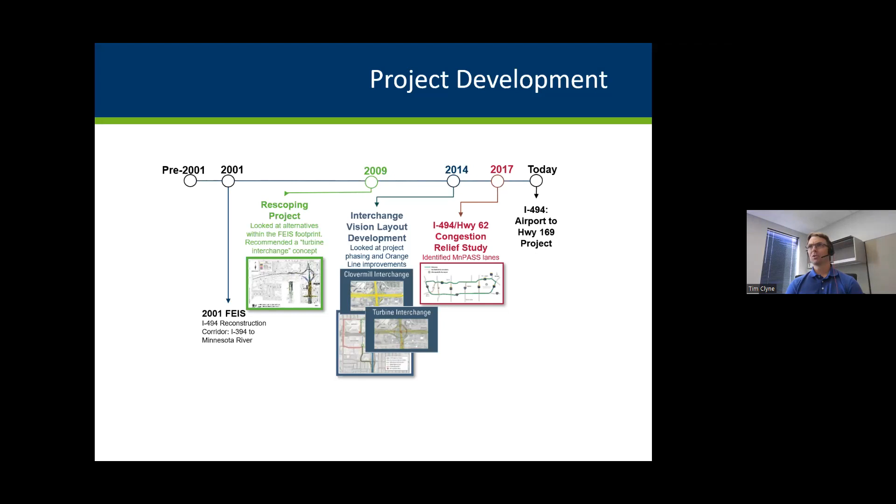The 494 corridor has been studied at length going back over 20 years. We started back in 2001, publishing the first report of what the corridor should look like. There were other studies published in 2009 and 2014, diving into more detail. Then recently in 2017, reports looked at both the Highway 62 and the I-494 corridors for congestion relief, and 494 was identified as the corridor to get the next round of improvements. So that brings us to where we are today.

This project is led by MnDOT, the Minnesota Department of Transportation, but we certainly can't do this alone. We have a lot of partners who have helped us along the process: the Cities of Richfield and Bloomington, Hennepin County, Metro Transit, Met Council, the airport, and our friendly feds at the Federal Highway Administration. We also have a whole bunch of stakeholders, of which the Corridor Commission is a part.

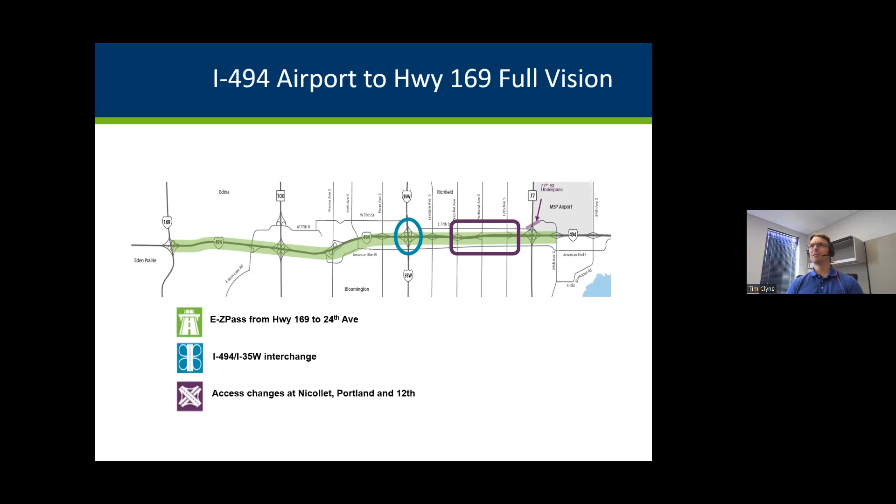As you can imagine, that's a long stretch. It's a lot of work, and when you add everything together, these various project elements to encompass everything probably cost upwards of 800 million to approaching $1 billion, and it's 8 to 10 years or so of a project. So we're not going to bite all of that off in one piece. We're parsing that out into individual projects where we're combining various elements.

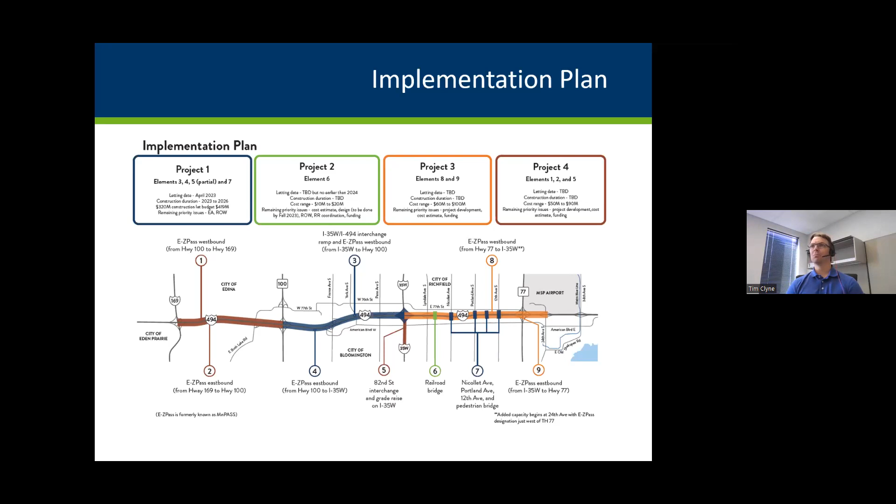I'll pause here and mention that the rest of the presentation is about this first project. We are currently pursuing other avenues of funding for the future once this project is complete. How do we continue on with the rest of the vision? We don't have those aspects funded yet, but we are actively pursuing and identifying different funding sources and different ways to deliver the ultimate vision we're looking at.

So let's get down to this particular project that's underway right now. What are we building? This project runs from East Bush Lake Road on the west end, just west of Highway 100, over to 12th Avenue, or just east of 12th Avenue.

We're going to construct E-ZPass lanes on 494, which comes with basically a full reconstruction of the entire 494 pavement section between East Bush Lake Road and 35W. That EZ Pass lane goes on the inside, so in order to accommodate that, we basically need to widen the freeway to the outside to make room for it. Along with that comes lots of improvements to the frontage roads, as we widen the freeway we get into the frontage roads as well.

We will reconstruct the 35W and 494 interchange to a turbine design. Right now it's a cloverleaf interchange, with loops in all 4 quadrants as well as diagonal ramps. We're taking out the loop that takes northbound 35W traffic to westbound 494, and that becomes a flyover bridge, or this turbine design bridge.

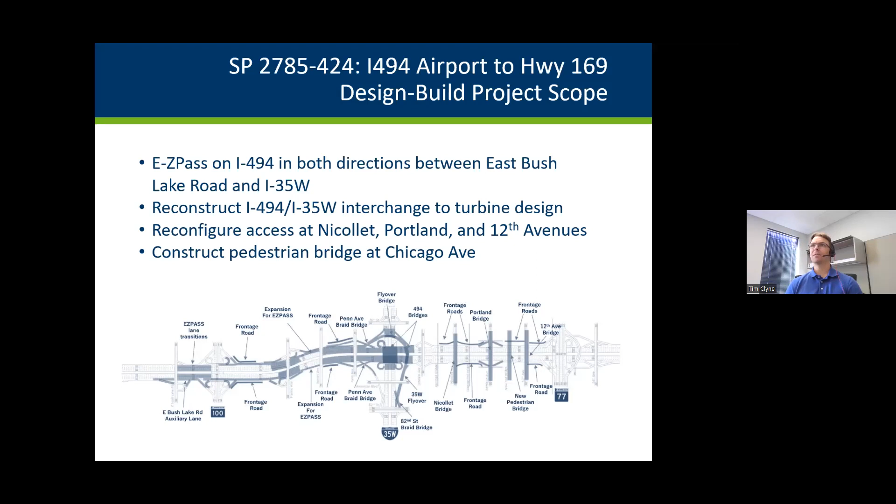But since that time in January, we've made some progress in the contract process. In March, we awarded and executed the contract with all the signatures and things. Late April, we gave McCrossan notice to proceed 1.

So, MnDOT, we're a government agency. There's forms to fill out and paperwork to do. So they had to fill out a certain amount of forms and do some submittals to get notice to proceed 1. That basically allowed the contractor to start doing temporary construction, which consists of crossovers in the median and widening in order to accommodate future traffic shifts in future stages so they can build the work.

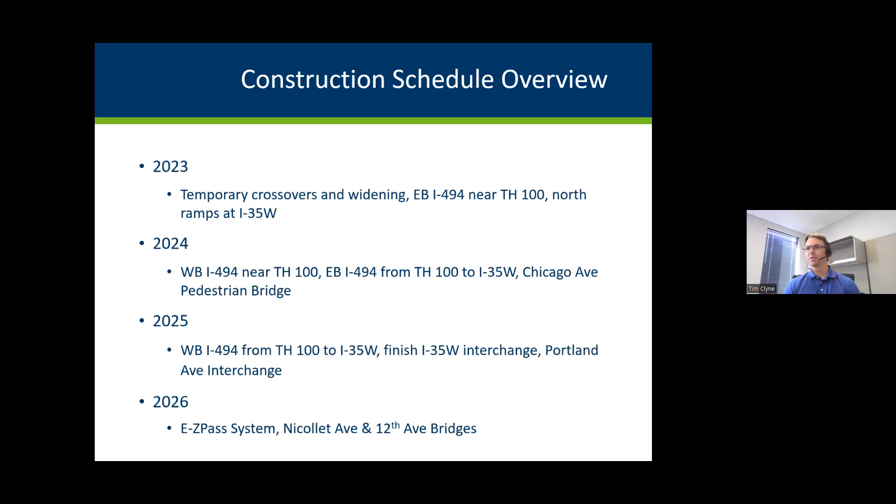In 2025, we'll flip and build westbound 494 from Highway 100 to 35W, and then also finish the work within the 35W/494 interchange and construct the bridge and the interchange at Portland Avenue. Then in 2026, essentially all of the mainline pavement reconstruction will be done, but we'll still be doing some cleanup work on the center median barrier, maybe putting up the electronics and signs for the E-ZPass system, and reconstructing the Nicollet Avenue and 12th Avenue bridges at that time.

Okay, so current construction impacts, what's been going on out there right now. The first act of the project was to restripe a third lane, or an aux lane, on westbound Highway 62 from Valley View Road to Highway 100. That happened in May. We've deployed an intelligent work zone system throughout the 494 corridor, and actually around the entire metro area, that has travel information signing. We've also recently put up trailers that show work zone speed limits, like work zone speed limit 55, and then it flashes your speed.

And we also have travel time dynamic message signs out further along the network, like up in Maple Grove or out in Woodbury, that say, for example, time to the airport on 494 is 15 minutes, on Highway 62 it's 12 minutes, things like that. Just tools around the system to help travelers make informed choices about where they need to be.

And then we've also got some short-term impacts on both MnDOT highways and local roads for various design elements and things.

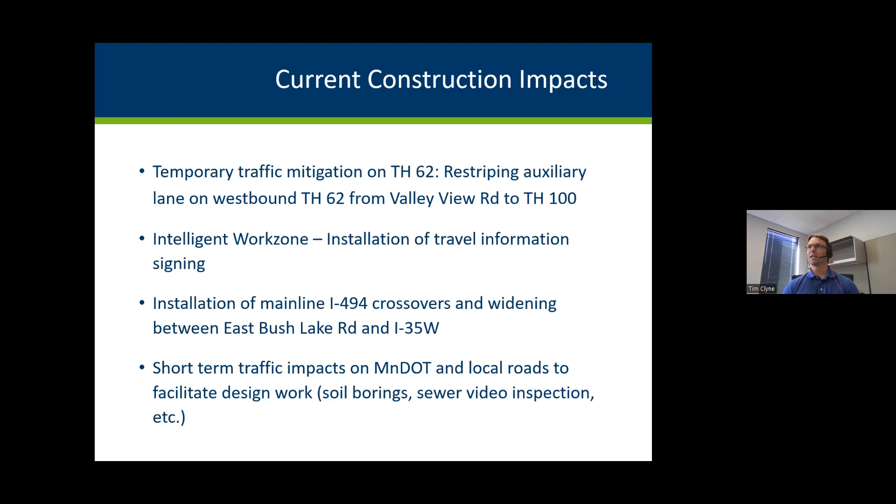Utility relocations will be a big part of the work. In coming years, we have over 20 different public and private utility owners in the corridor, anything from storm sewer, sanitary sewer, gas, electric, telecommunications. There's a lot of it that's kind of in the way of the infrastructure we're building, so we need to move some of those utilities out of the way.

And then over the winter here, we'll start building some structures, things that are offline that don't impact traffic.

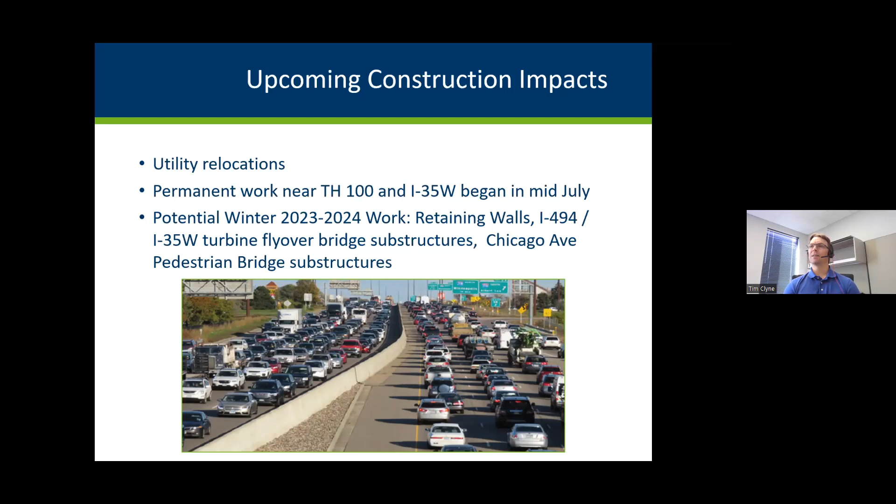There's not going to be much work on the local road system this year, just a little stretch east of 35W and west of Lyndale Avenue. On the north side, there's Girard Avenue, a frontage road that goes to a shopping mall, where we need to reconstruct Girard Avenue and the infrastructure in that area. On the south side, we'll be closing Clover Drive, a local frontage road, and building a couple retaining walls that will ultimately hold some stormwater ponds in that area.

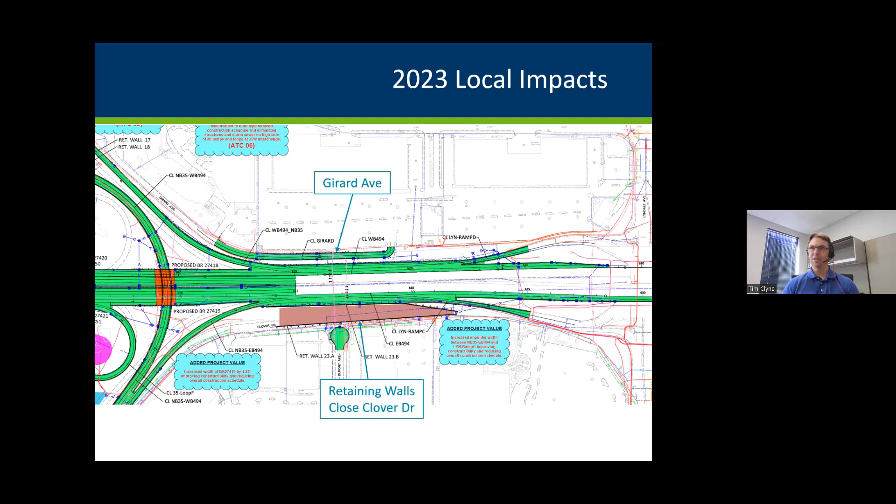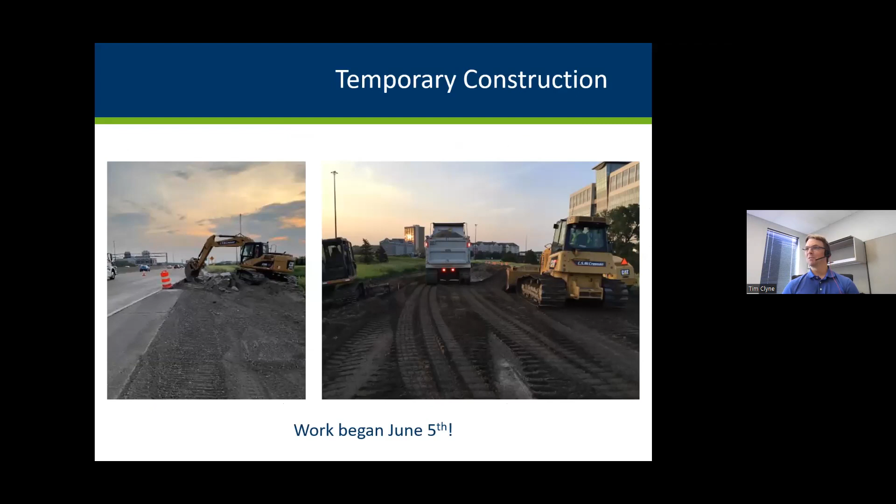So I like seeing, I'm a construction guy, I like seeing backhoes and bulldozers and stuff. Maybe not everybody enjoys seeing that because it means it slows down your commute, but we've been out for about the last month and a half or so doing dirt work, doing some temporary paving, just to prepare for future stages of the work. So that's the fun part.

Unfortunately, to build a project like this, we need to close roads and ramps and provide detours. We're still going to maintain 3 lanes of traffic in both directions of 494 during construction during the day, but there are times when certain movements will be closed off.

So in general, we'll use Highway 100, Highway 77, Highway 62. Just on a high level, those are detour routes when certain movements between 494 and 35W are closed, and then even out to Highway 212 and up to 62 for some of the movements.

I apologize, these slides might be a little busy, but they actually show all of the signs that you would see as a traveler moving through.

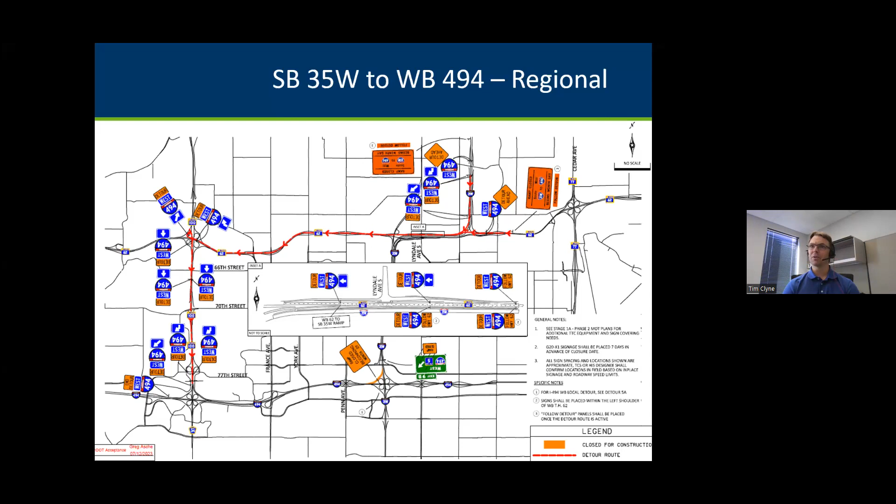For example, this next weekend, Sunday night, we're going to close the ramp from southbound 35W to westbound 494. That will close for the remainder of this construction season until mid-November. So to keep traffic able to make that movement, we'll catch people up at 35W and 62, send them west on 62, south on 100, and then meet back up with westbound 494.

That's for the more regional detour for those people who live or work in Richfield and might get on from 66th or kind of sneak through the signs on 62.

Then we can have people drive the loops. If you remember Chevy Chase on European Vacation from a few years back, I'm dating myself, but you can get dizzy driving the loops between southbound to eastbound to northbound to westbound in order to complete that movement.

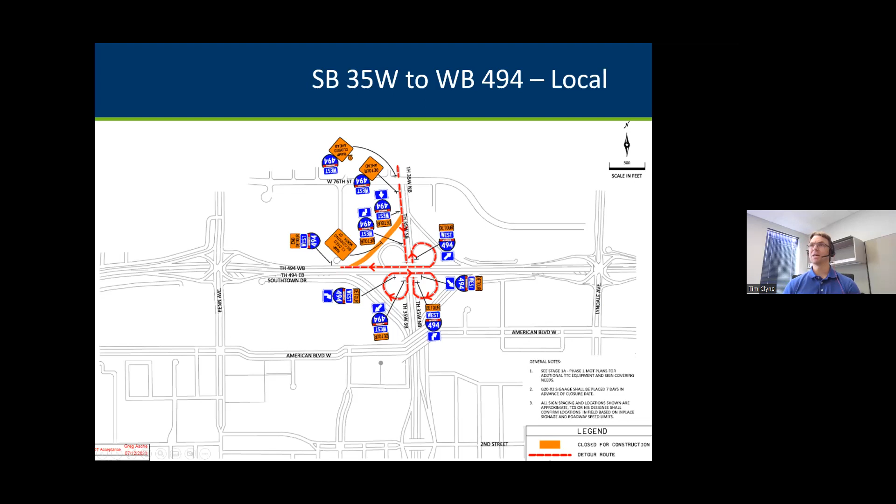We will eventually, later this fall, be closing the on-ramp from Lyndale Avenue to westbound 494. So for local road closures, we'll detour that traffic to local roads - down Lyndale to American Boulevard, up Penn Avenue, and then west on 494.

We'll also have times, weekends or overnights, where the westbound 494 to northbound 35W ramp is closed. And there again, we'll send people through the 3 loops at the interchange to complete that movement.

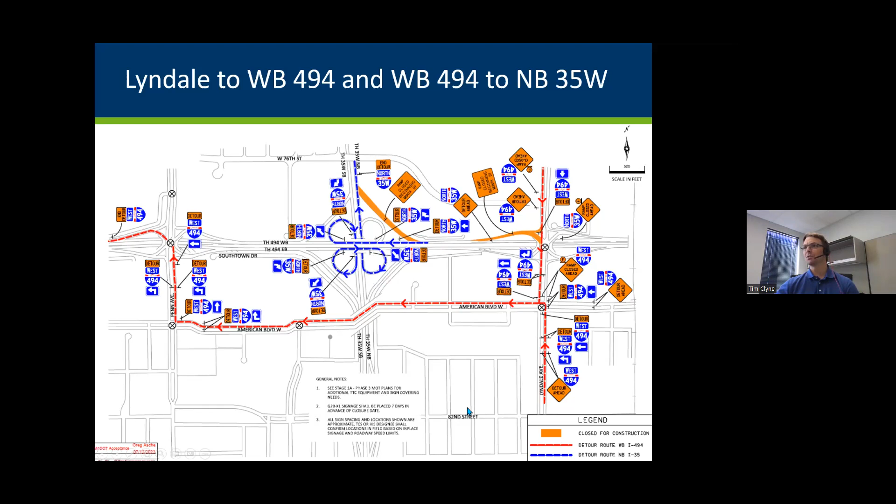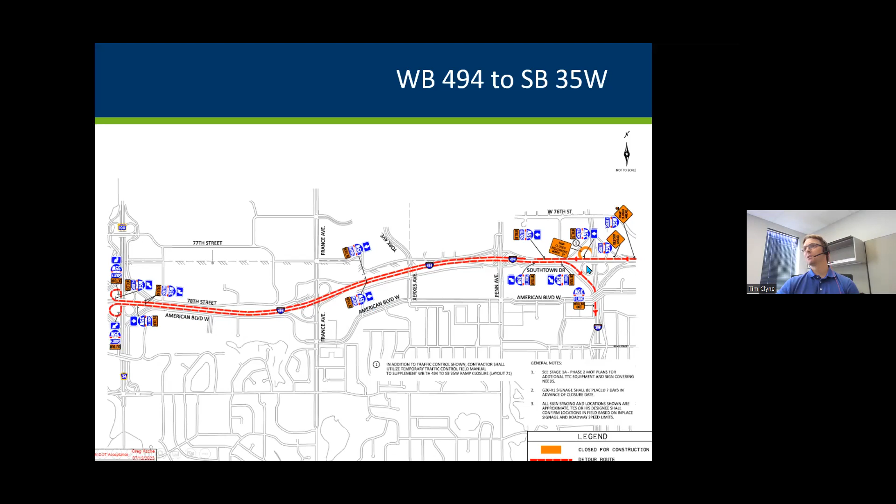Sometimes, and I'm not going to go through each of these detours in great detail, this particular loop may come in future years - sometimes we'll send people west all the way to Highway 100 and basically make a U-turn at Highway 100 to come back east to go south on 35W. We'll do things like that.

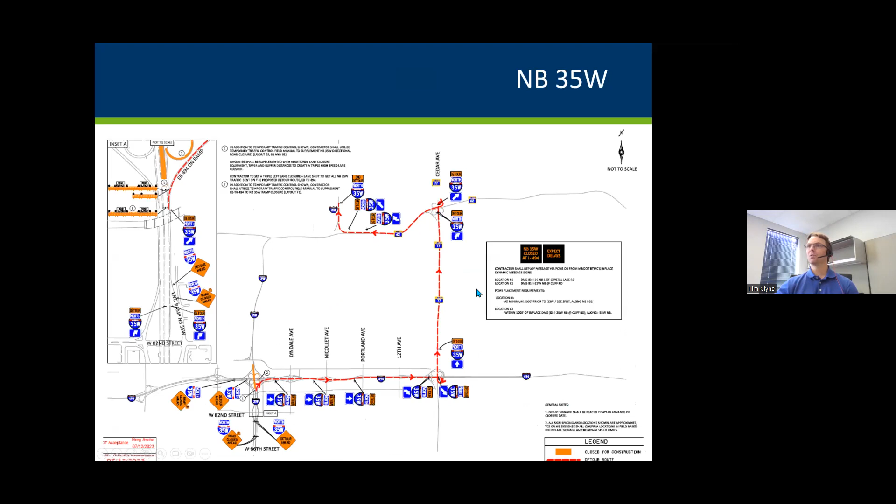We will have a full weekend closure of 35W in the project area the weekend of August 4th to the 7th. In that case, we will send traffic east on 494, north on 77, then back west on 62 to continue north on 35. Southbound, we will generally send traffic west on Highway 62 to Highway 100, back east on 494, to south 35W.

At the same time, that weekend of August 4th, we are going to join with the 35 project to the south. I'll touch on that at the end of my presentation, but in that case the detour is over to 77, down to 35E and all the way down.

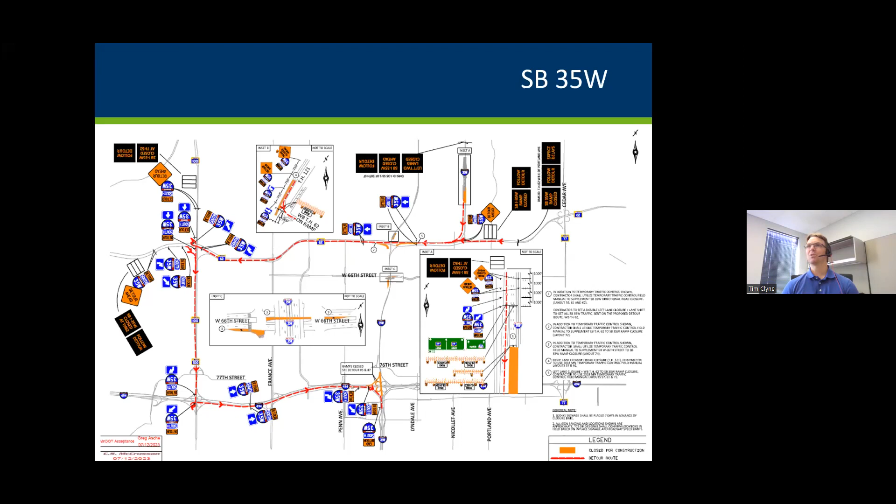So long story short, just follow the signs, plan ahead, and be patient with us. We know it's a bit inconvenient to have road closures and detours as we do these project improvements, but in the end we're trying to make a better, safer freeway system along the 494 corridor.

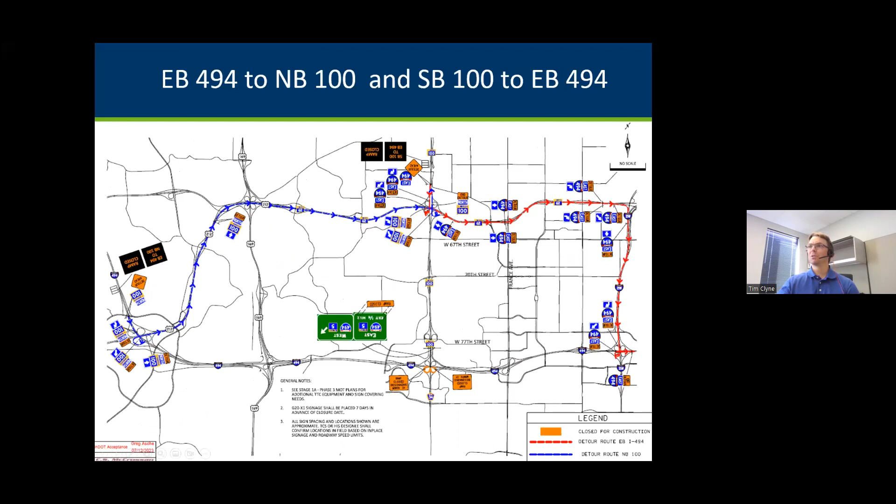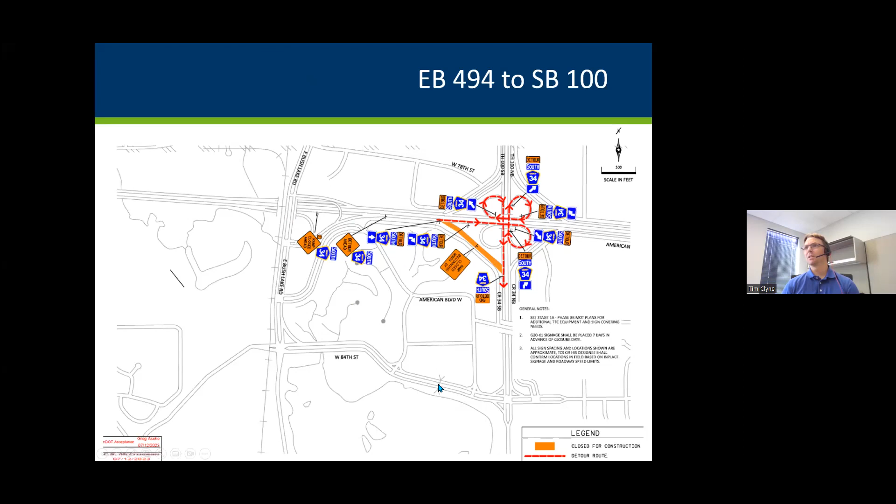Here's one of the schematics for using 212 when the ramps at Highway 100 are closed, and then more local ramp closures at Highway 100 and 494, in the Highway 100, East Bush Lake Road area. I'll slip through these pretty quickly.

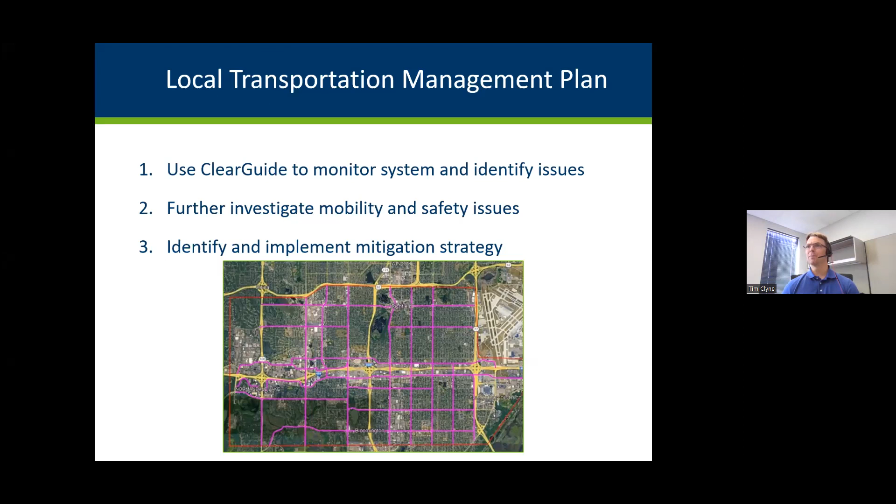I was just talking mostly about the freeway system itself, 494 and 35W, but we know that during construction, a lot of traffic is going to naturally divert to the local system in Bloomington, Richfield, and Edina in particular. So we also have a robust program to monitor all the routes along the local road system, identify problems, congestion, and delays that may happen, and implement strategies to mitigate those delays. Our contractor is ready to install things like temporary signals, turn lanes, restriping, speed bumps, and things like that. So just know that on the local road system, we do anticipate traffic to be busier while traffic diverts off the freeway, but we will do our best to mitigate the delays there as well.

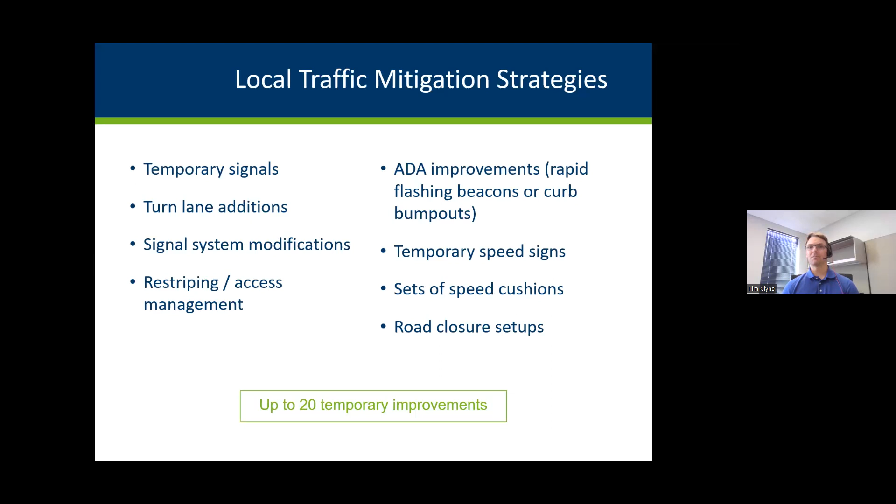Okay, so now I'll talk about some of the specific project improvements. What are we buying for our $377 million?

One of the major things here is widened and reconstructed pavements and bridges. The interstate was built 60 years ago, so it's time to be replaced. Along with the widening for the express lane, we will reconstruct the main line. In some stretches, there could be upwards of 5 or 6 lanes in one direction of freeway traffic.

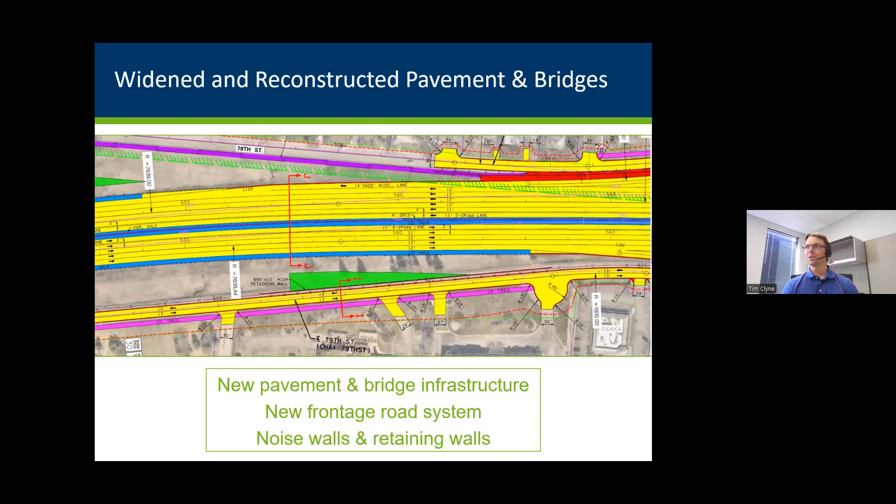Along with widening the freeway, we also need to work on the frontage road system, so there's a lot of improvements and reconstruction of the local roadway system around the corridor. We need several retaining walls throughout the corridor to hold those various roads up in tight geometries. And there will be, I believe, 5 noise walls constructed in various locations to reduce the nuisance traffic noise for adjacent properties.

We're also building what we call braid bridges in a couple different locations. Right now, if you're going south on 35W and you merge onto westbound 494, you merge in right by the Best Buy property, and there's also traffic trying to get over to the right to exit on Penn Avenue. It causes a lot of congestion and safety concerns, crashes.

But what that does is eliminate the option to, if you're coming from 35W, merge onto 494 and then immediately exit at Penn Avenue. So you'll have to plan ahead and make different movements there. It's the same thing going eastbound - the entrance ramp from Penn to eastbound 494 goes up and over the exit ramp from eastbound 494 to south 35W.

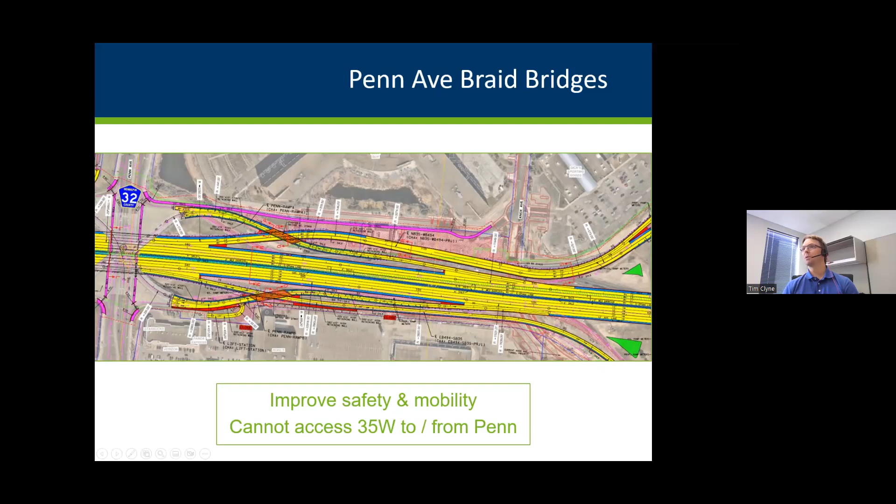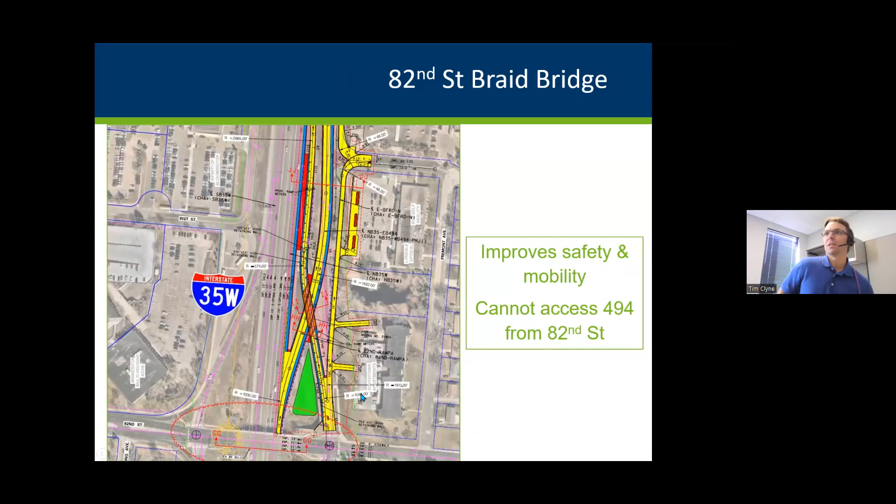We have a similar braid bridge on 35W and 82nd Street, just south of 494. Again, traffic will no longer be able to go from 82nd Street to northbound 35W to 494, so you'll have to plan ahead and make different movements there.

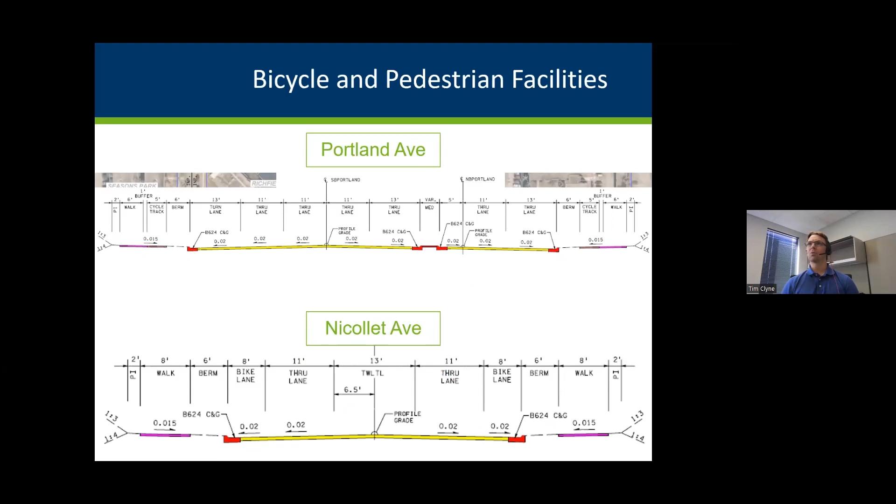We're making a lot of bicycle and pedestrian upgrades. For example, on Portland Avenue there's a cycle track on both sides of the road behind the curb, with new concrete sidewalks next to each other. On Nicollet Avenue, there are on-street bike lanes along with wide sidewalks on either side of the road. There are trails, cycle tracks, and walkways throughout the entire corridor.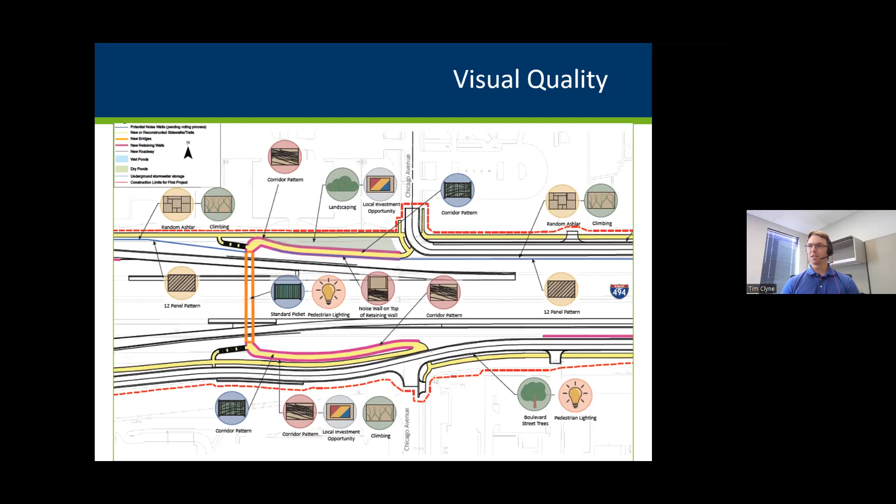Visual quality is another improvement we'll make. I'm an engineer, so I think concrete is pretty, but not everybody wants to look at just bare concrete. So we have different patterns that will go on the noise walls, retaining walls, and bridges. We have landscaping elements like trees, bushes, and climbing vines. There are railings that will go on different walls - this pedestrian bridge, for example, has railings with certain patterns that look nice, plus lighting for pedestrian walkways. We want to make the experience for all users a pleasant one as we drive through the corridor.

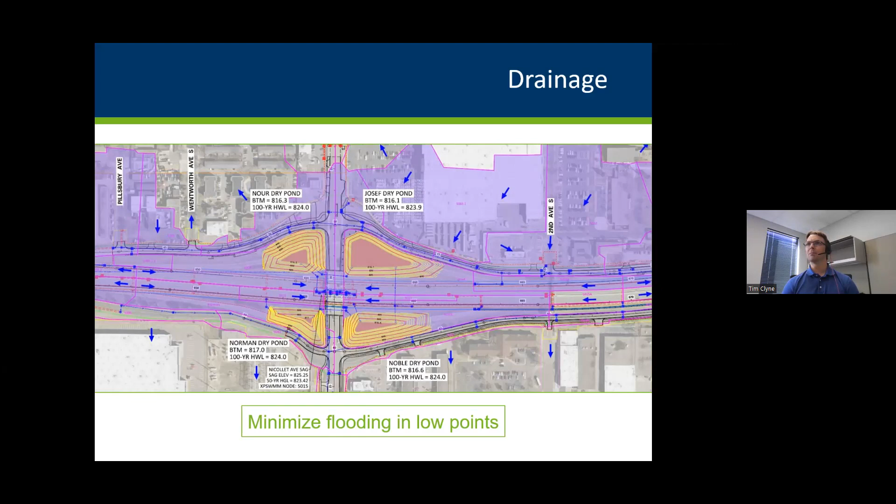Drainage right now - under really heavy rainfalls, 494 can occasionally flood at times. We don't like it when our interstate floods, so we're making some drainage improvements. I'm not going to promise we'll completely eliminate flooding, but we should go a long way in minimizing the flooding at low points along the corridor.

So that's a really quick run through of the project in general, traffic impacts, and the improvements you'll see. Part of the effort and why you're here today is a robust communications effort to share the news with the traveling public about what's going on and what MnDOT is doing. We have two other projects in the vicinity of this 494 design build project, and a single consultant managing all three of those projects.

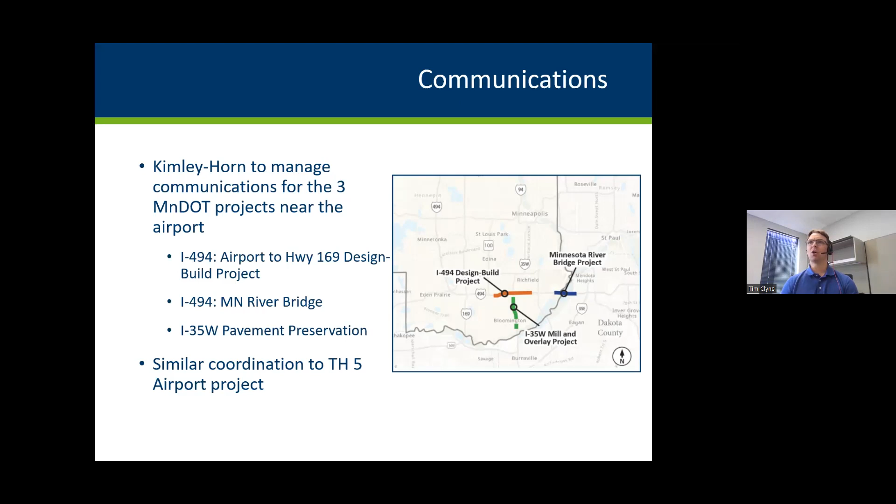For the 494 project I've just talked about, this consultant, Kimley-Horn, has set up both an email and a phone hotline that you can call or email questions and concerns with. A lot of those come to me and I can respond, or a lot of them they can just handle and answer - but we'll get your questions answered.

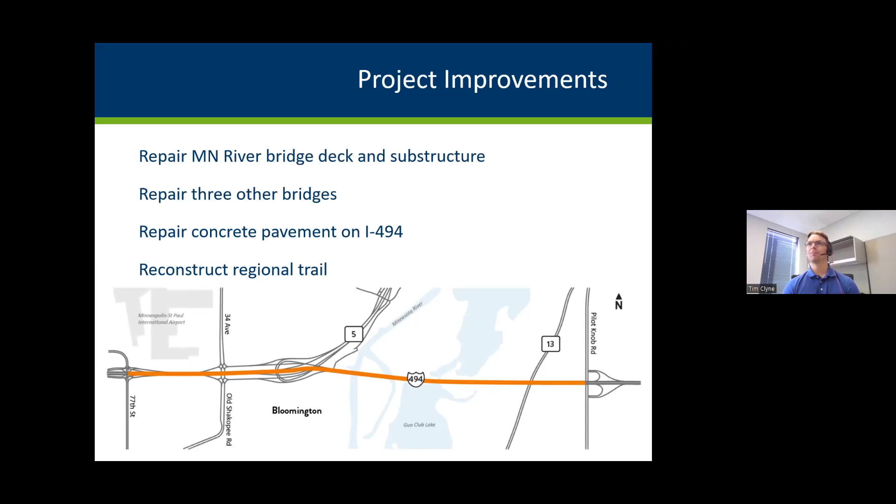There are a couple other smaller bridges on both the east and west side of the river that will be repaired along with the project. There's concrete pavement on the west side of the river, right in front of the airport on 494, that will be repaired, and a regional trail on the eastbound 494 bridge. Those are the major improvements with this project, which is a 3-year project that will dovetail pretty nicely with the design build project just to the west.

This year, they've mainly been working on the inside median, building some crossovers, and drainage improvements to prepare for future years. Fairly minimal impacts to traffic—some lane shifts, some lane closures—but it shouldn't be terribly impactful.

Next year in 2024, and then the following year, traffic will be reduced to 2 lanes in each direction. First, next year, we'll shift all 4 lanes of traffic—2 eastbound and 2 westbound—onto the eastbound bridge across the river, while crews repair the westbound bridge. There will be a temporary ramp constructed.

There will be short closures of the ramps at 24th Avenue, with short detours to and from the Mall of America. And then, like I said, repairs on the concrete pavement and the bridges west of the river.

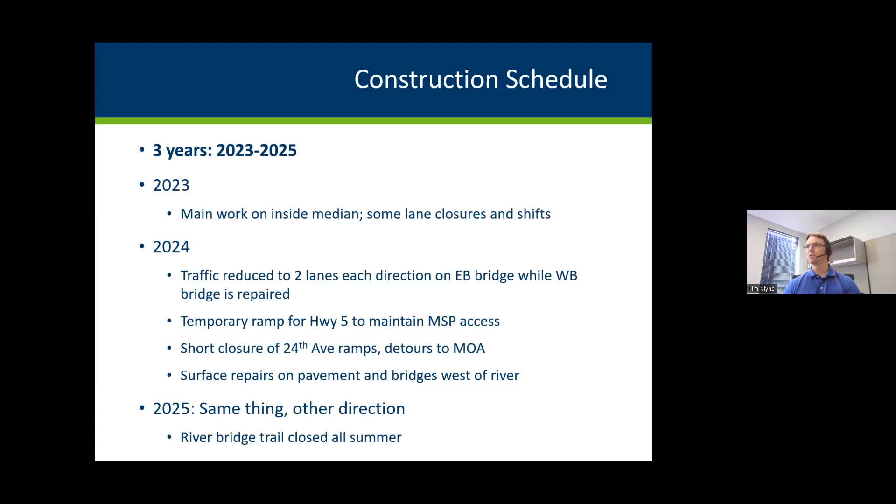In 2025, we'll flip traffic and do the same thing, just in the other direction. So again, 2 lanes on the westbound bridge while crews repair the eastbound bridge. And in 2025, the River Bridge Trail will be closed for the entire season.

Again, it's the same email and phone hotline as the design-build project—they're both 494 projects. There is a separate web page for the construction project, and I'd encourage people to sign up for email updates on that project website. And of course, you can check 511 for information as well.

And then the third project: I-35W, just south of 494. This project starts at 82nd Street in Bloomington and goes down to 106th. It's been going on this season already—it's basically a mill and overlay, or pavement resurfacing project, from 82nd down to 106th.

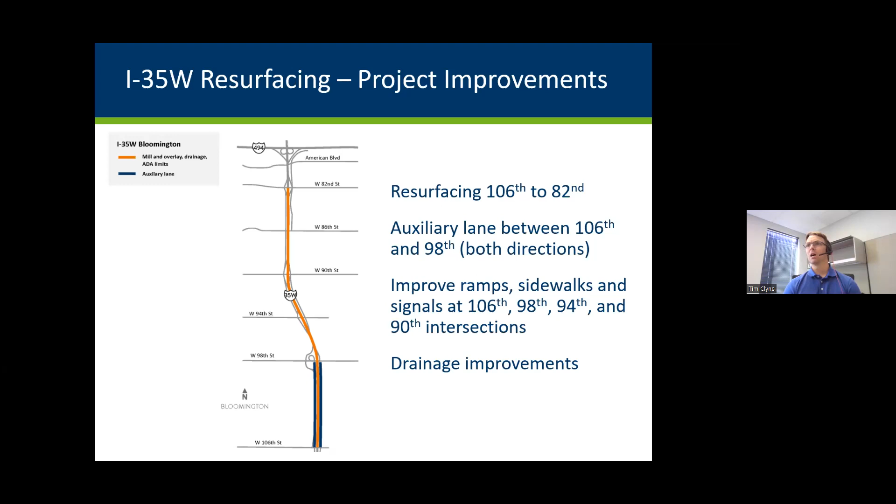We are building auxiliary lanes between 106th and 98th Street interchanges in both directions, so there will be an extra lane both northbound and southbound. And at each of the interchanges at 106th, 98th, 94th, and 90th Street, there are signal improvements, pedestrian sidewalk and ADA ramp improvements, and various drainage improvements.

This project has been going on most of the summer, so it's actually just about done. There are 2 more weekend closures coming of southbound 35W—the first is this coming weekend, and the following weekend, August 4th through 7th. This project should be complete by Labor Day, so those impacts are starting to wind down.

And again, there's a separate email and phone hotline to ask and get your questions answered, and a project website where you can sign up for email updates.